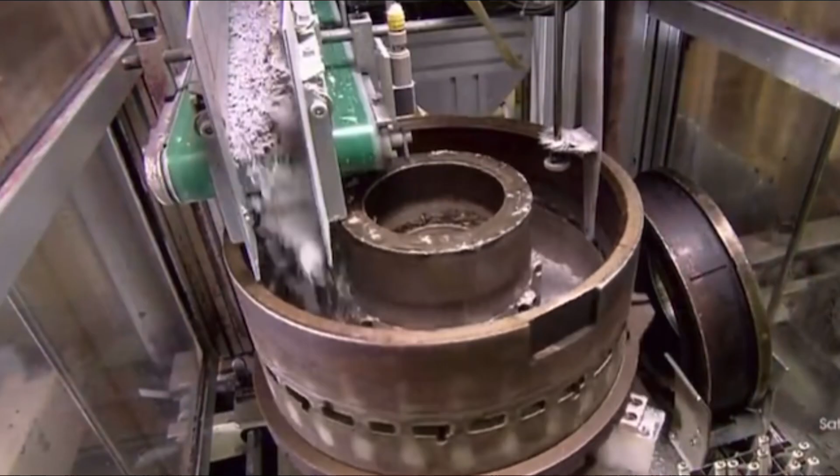The definition of manufacturing system: manufacturing systems are the different processes of transformation and production of a material or raw material throughout the use of tools, machinery, energy, and work.

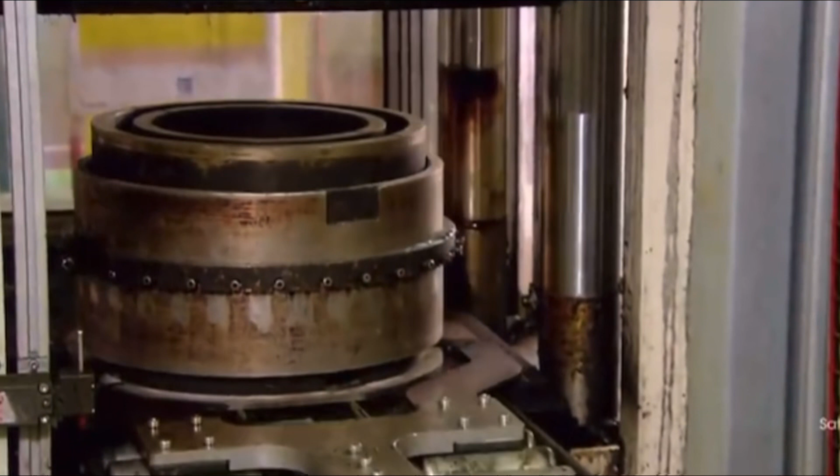In manufacturing systems, it also includes production facilities like machines, manual workstations, automatic plants, material flow systems, and so on, which are linked with each other for a certain type of production.

Support systems, like the procedure of the system, the management of production, solve the technical and logistic problems associated with the design of the product we want to make.

It is also defined as a combination of all the actions and processes used throughout the production, like the machines, combined into one to make just one good product.

The first manufacturing system for the disc brake is manufacturing process and assembly. The brake discs were made using sand casting. If necessary, the casting patterns can be made from wood.

The molds were made using a green molding technique that utilized locally available materials. The aluminum scraps were melted in a crucible furnace to make the casting material and then poured into the sand mold to form the brake disc.

For quality control on the brake disc, the low pressure die casting (LPDC) system is used. This system allows for a homogeneous filling of the brake disc as well as a good thermal balance to achieve a good solidification behavior. Next is basic disc shaping operations.

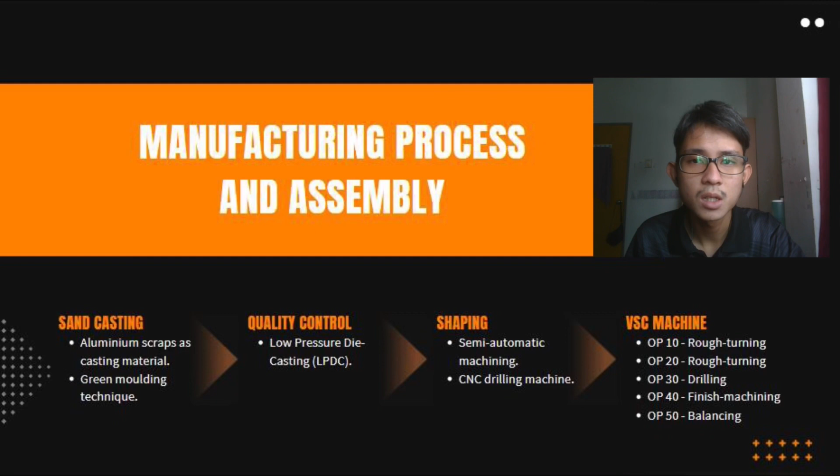Finally, the second manufacturing system for the disc brake is the production machines. The production machines used here are semi-automated machines, which perform a portion of the work cycle under some form of program control and are joined by a worker for the rest of the cycle.

Loading and unloading parts are common worker tasks. A few workers would perform the molding process here before storing the product in the workpiece box.

In the system, the automated part will start once the workpieces are stored in the workpiece box and transported to the picking cell in the machine production line. The VSC machine is typically equipped with 4 machine arms connected by an

EMAG track motion system. With these machines, users can modify the system at any time, for example by switching out a machine from the process if not all the steps of the operations are required for a workpiece. Furthermore, EMAG can integrate several identical machines that perform the same operation in parallel into the chain.

The track motion distributes the workpiece to the nearest available machine. In this case, tooling work on a machine does not imply downtime on the production line.

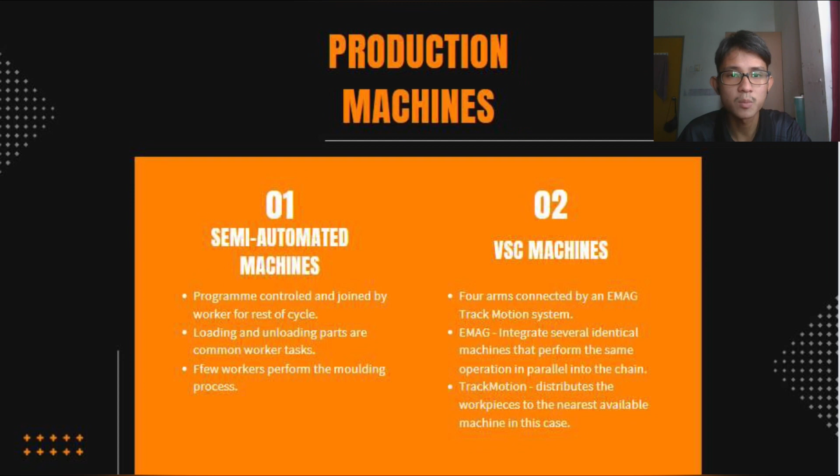Hello, I'm Alec Anaman. Here I want to tell about the computer control system. The computer control system can be thought of as a way for a digital computer to manage a manufacturing process. A computer is used to run the automatic system, and computer process control is specifically relevant to continuous or semi-continuous operation. There are three computer control systems used for brake disc manufacturing.

One of them is computer aided design, or CAD. CAD uses a computer to assist in the correction, modification, analysis, or automation of the design. This program is used to increase design efficiency, design quality, and create a database for manufacturing.

Second, we use the warehouse management system, or WMS. The WMS is a set of procedures and guidelines that are frequently used in the assembly line to improve logistic efficiency. WMS includes intensive inventory management capability, including barcode, stock count, and batch number to keep track of the brake disc.

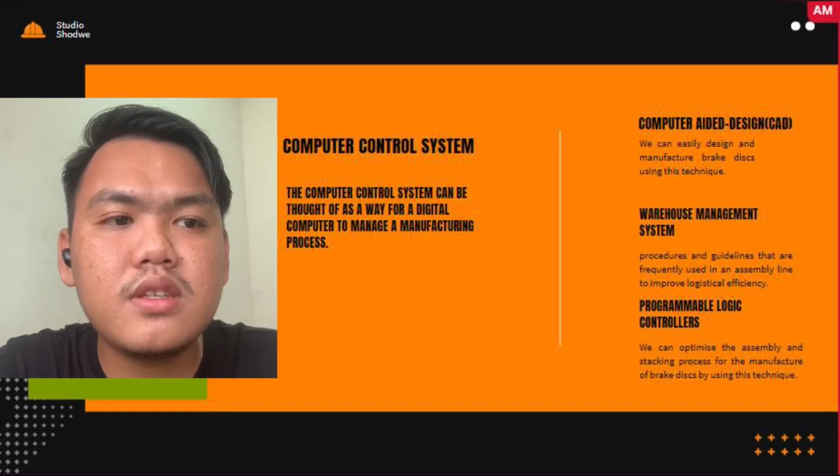For the human resources, two operators will melt aluminium scraps from the melting deck station in a crucible furnace using two machines, like at the melting deck.

Quality control in the finishing area requires three operators and one machine to transfer the brake disc from the LPDC cell.

At storage, two persons store quality-controlled brake discs in a workpiece box. At the VSC machine, two persons monitor data in production while two machines spin, drill, mill, and grind.

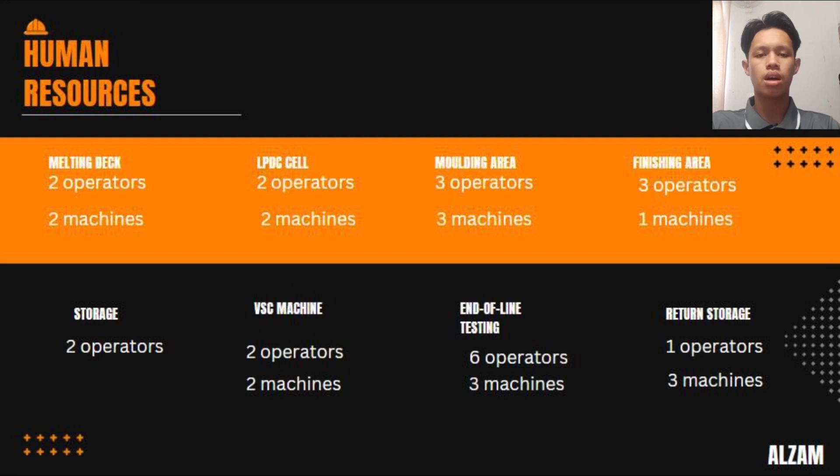Return to storage: one operator will monitor the conveyor belt status, and three machines will load the brake disc from the conveyor belt to storage and record the total number of ready-to-use brake discs.

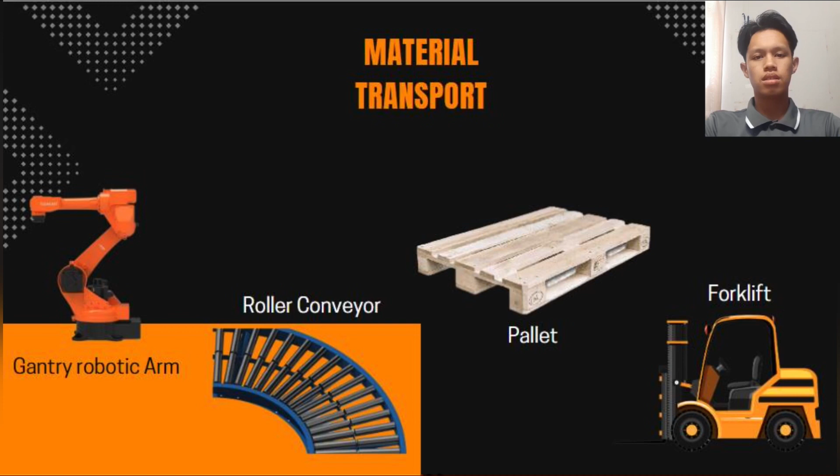For material transport, gantry robotic arms, roller conveyors, pallets, and forklifts are used to carry the material.

Hi, my name is Dorothy, matrix number 74626, and I'm going to tell you about our storage and identification system. As we all know, the storage and identification systems are two very important components of the manufacturing system. The storage system allows us to organize our materials and also allows the workforce to access them easily.

So the one that we have chosen is the pallet racking system, with loads placed on top of double-deep pallet racking, which allows us to know the location of our product, the brake disc.

The next one is our identification system, which is a barcode scanning system. Once you have scanned the barcode, it will tell you the details of the product, the technical specification for the product, as well as the location where the product is stored.

This shows that time and energy will be consumed efficiently by using the pallet racking system as well as the barcode scanning system.